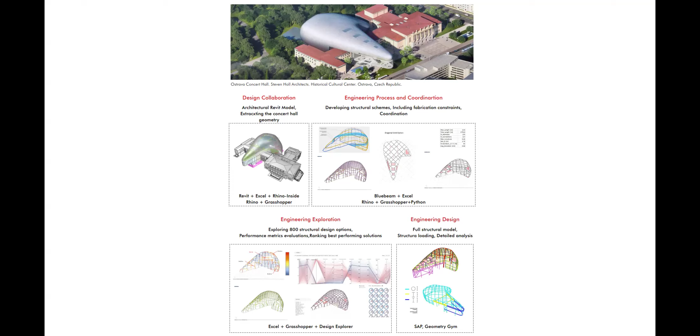This is an example of dome structure. This is a renovation project and studying the performance of dome. This is a Park Synagogue in Cleveland, Ohio. This is challenges regarding application of wind loads on dome structures and finding retrofitting measures.

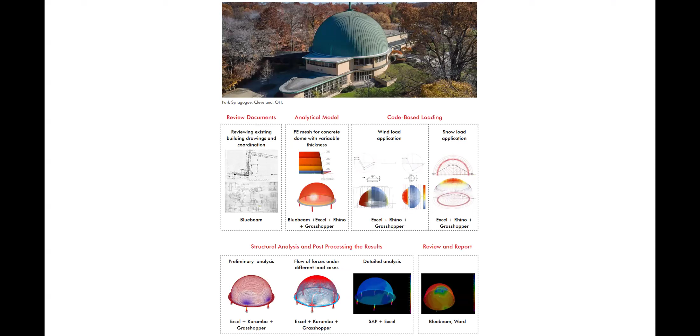This is a good example of how we use different materials for basically retrofitting existing buildings. This is buildings by NYCHA for affordable housing. The issue was the roof of these buildings is very old and it's leaking. So there's a lot of expensive measures that need to happen for the roof structure. And instead, this was a proposal to use mass timber to build a rooftop, basically a community garden as well.

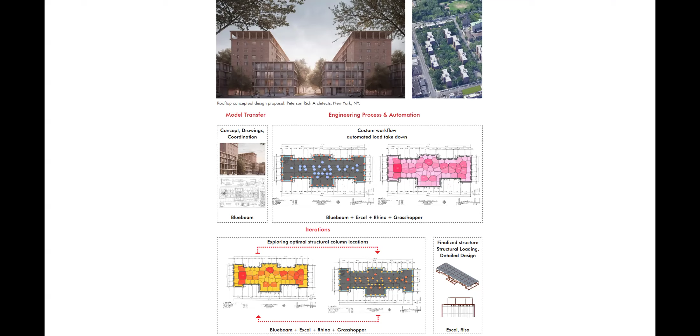And the idea was how to use lightweight materials in a way that the location of columns is optimized so we don't need any retrofitting for the foundations. That was why we went to mass timber.

Also, some of the design build projects and research work that I do, this is what I designed for the entrance of botanical gardens. Do people know Matthaei Botanical Gardens? It's a cool place for hikes and has a good conservatory. This was done as part of my research in my PhD, and we got a grant to design and build this piece. It was sitting there for 2 years.

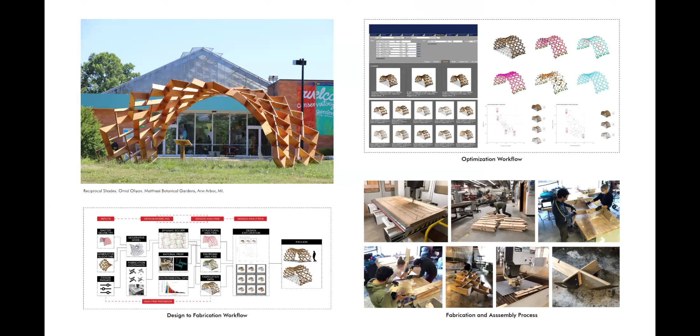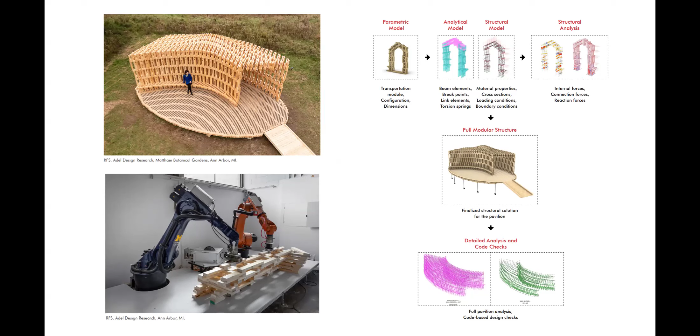This was a more recent consulting work that I was doing. Again, this was built at Matthaei Botanical Gardens. This is robotic fabrication of lightweight timber structures. This relates to the ideas that we're going to use in this term. It's interesting to think about reusing materials. This is small pieces of wood coming together so they can be recycled wood, reclaimed wood, and using robotic fabrication to take care of the complexity of assembly process.

This was another research design build project that was done at the University of Michigan. And the idea was to replace the connections in heavy timber joinery. Instead, we used tree forks. And this was the idea of going to these timber yards, finding these scrap material, bringing them, scanning them, figuring out a workflow that we can design them as connection pieces.

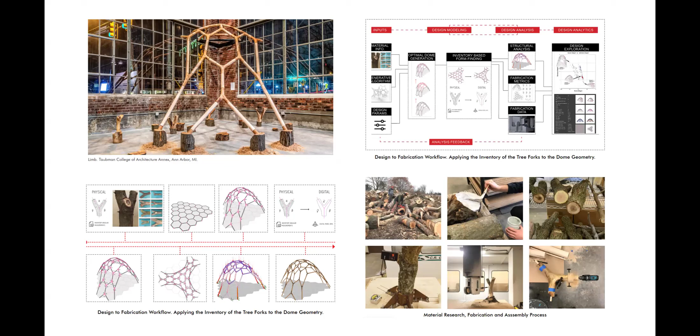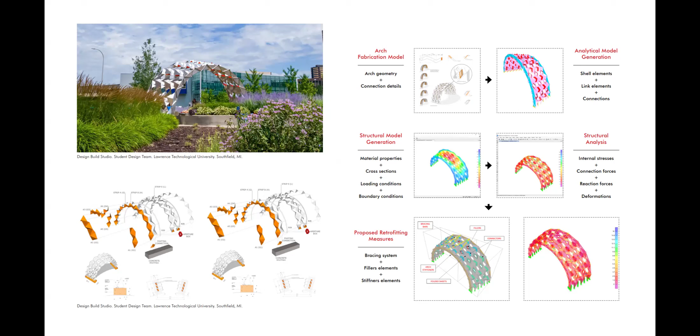I also did some projects at LTU and engaged in design build courses here. This was retrofitting measures for this arch. I don't know, have people seen this arch? It was sitting on your campus, yeah. So the idea was to analyze it to figure out if we can put some retrofitting measures in case we want to use it long term. This was how analysis informed figuring out those measures in terms of bracing, infills, and things like that.

Hopefully you get a chance to do these. There are a lot of interesting things where your fabrication, design, structural analysis, structural aspects all come together and you figure them out firsthand. So these are quite interesting projects.

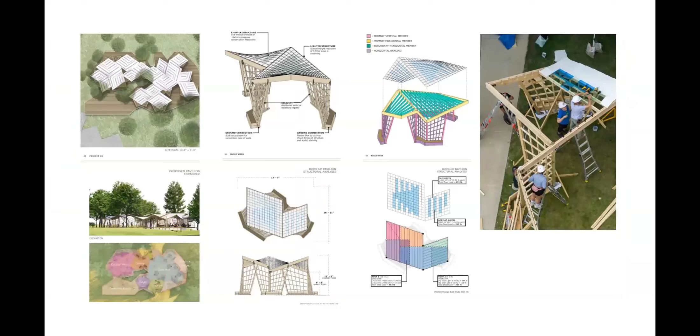This is another one which is at the entrance. This is interesting in terms of the lightweight wood framing, and then how they figured out the complex geometry using just linear elements. Okay. Hopefully we get a chance to talk about this type of projects as we work through the coursework.

But in terms of the syllabus, first of all, does everybody have access to Canvas? Is there anybody who doesn't have access? Yes, you're not in there, but you will be added to the course and you should be fine. But let me know. We're going to be in contact for the next 2 days.

So you should have access to the syllabus and you should already have gone through this. I'd like to review this together to make sure that we cover all the materials. Also, during this class, at any point you have questions, just ask questions right away. You don't have to wait. I don't mind interruption regarding the coursework or any other relatable question. Okay.

Let's see if we can share this. Right, it's good. I'm going to talk about Canvas files. We have some folders in Canvas where we share the information about the course and materials. Course description, please read through these and let me know if you have any questions.

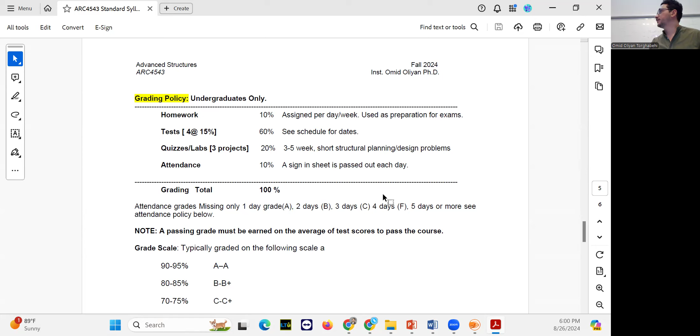Grading policy. Okay, so here is your breakdown of your grade. Homeworks. So we have homework submissions every week, and that's 10%. But I highly recommend you keep the due dates, review the homeworks, submit them on time. That's how you will be prepared for the test. I will share the homework answers later, past the due date. So you should really keep up with the due dates, but the homework answers will help you to understand that. But if you have any questions, talk to your TA or bring your questions here.

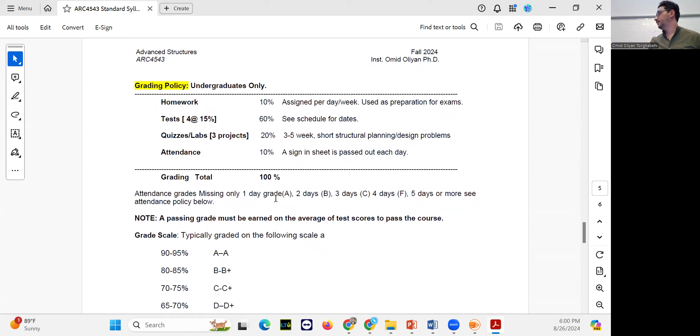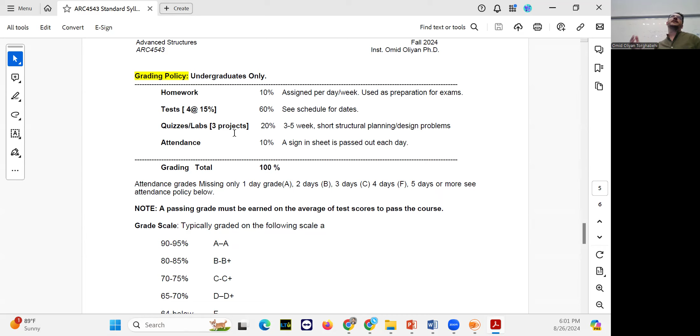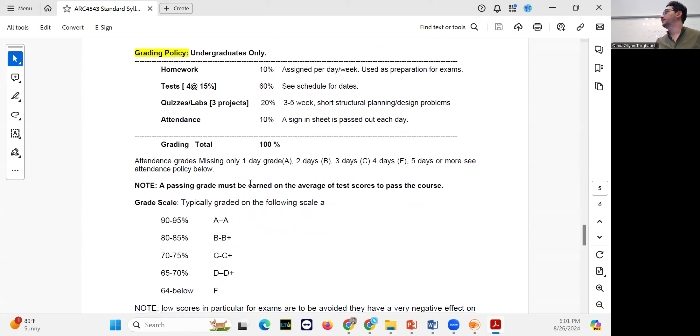The tests: you have 3 tests and then a final exam. You see, 60%. You have to really do a good job on that to get a passing grade. You have quizzes. There are 3 projects, team of 2, and that's 20%. And each of them has different phases. So weekly, maybe 1/3 of the class will be just going through your submissions every week or on the due dates. Also, attendance is mandatory. Do not miss a class. This is 10%. And also, you have to be present to ask your questions and understand the lecture content. So that's part of the grade too. And we'll take attendance at the end of the class.

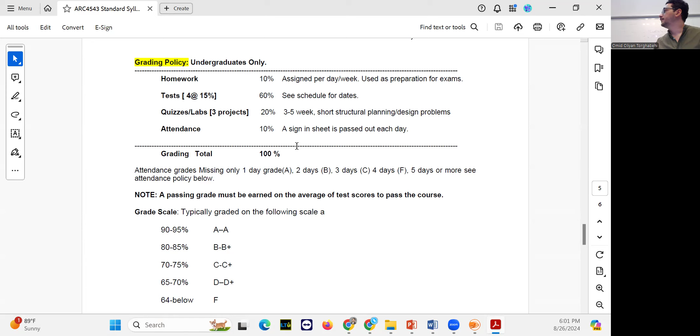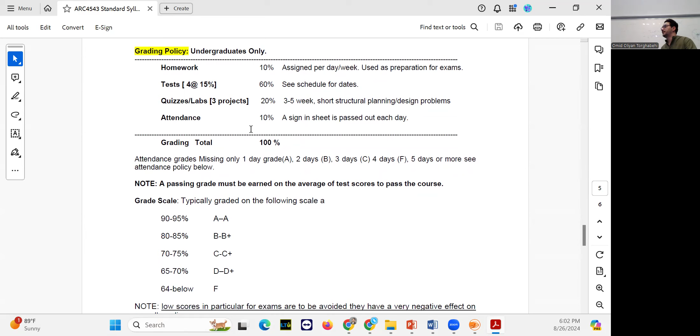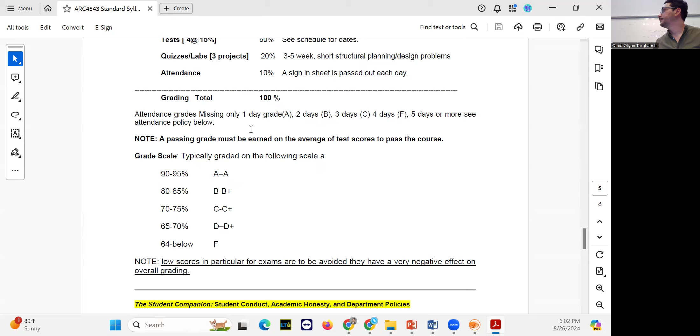Any questions about the grading? Once we talk about the projects, you'll know the nature of those projects, but everything will be shared the week before. Yeah. What's that? No, it's not going to be a cumulative of all the tests. Yes, and each test is just that chunk that you pass. For example, the first 4 lectures is test 1. Any other question?

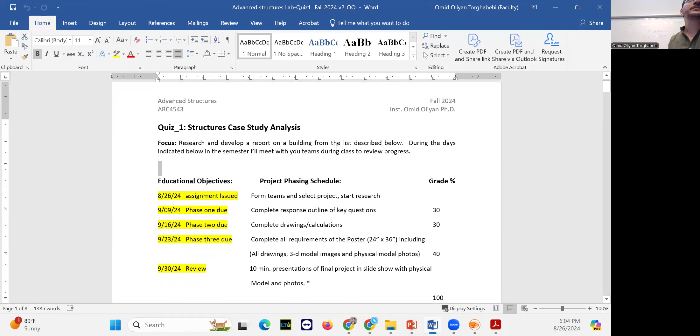Are there any questions about the schedule? Okay, take a look at it. Let me know if you have any questions. Everything should be self-explanatory, but let me know. And lab quiz 1. Okay, so this is lab quiz 1, for example. This is shared. You should have access to this. Please check first thing that you have access to this. The first assignment is to build your team. This is a team of 2. And you should choose your project from the list of projects, which is given at the end of this project description.

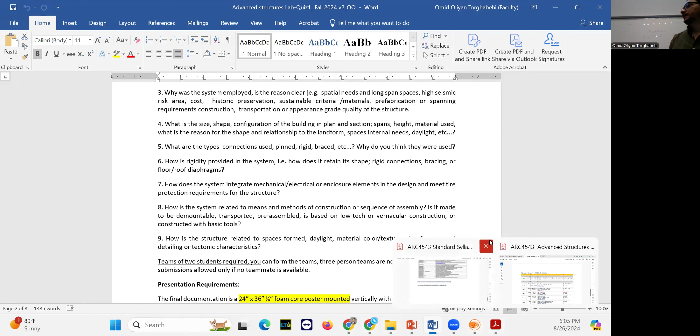This is a series of projects; this is a case study project, basically. You go through the project, you understand the project, you explain. You first do good research, find as much material as you need in terms of the structure, integration, architectural aspects, to answer a series of questions here. So this is phase 1, which is due on September 9th. So you go through all of these questions. First of all, you should choose your project. And because you have 18 students, so 9 teams, this is first come, first serve, no duplicate projects.

And for that, in the announcements, I guess I sent you, there's a Google Sheet that you, okay. Let me share this. So here is the announcement. Since it's first come, first serve, the first thing after class, go through those projects. And there's a Google Sheet here. You need to find your teammate, put the name. Oh, you're already done. Look at this. Pretty good. See, that's getting filled up pretty fast. So find your teammate, find a cool team name.

So you should find a teammate. Forgot your name. What was your name, all the way back? What is your name? Oh, you're already a team. All right. Just wanted to make sure you have a teammate. Okay, good. So fill this in. I guess everybody already has, or you're close. Perfect.

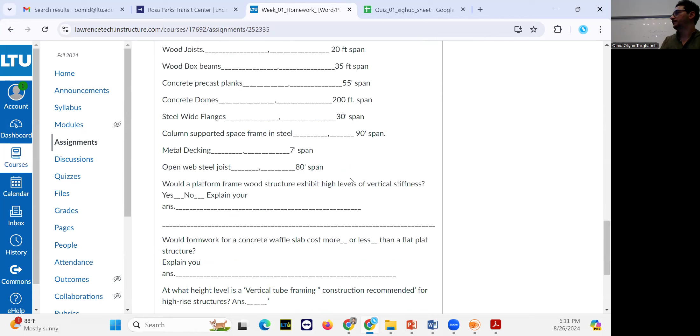The rest of your homeworks are online through your gradebook. You just enter calculation numbers. But this one is 2 readings. There are links, but there are also the PDFs if you don't have access to them for any reason. You read the readings, answer questions, and there are some simple span calculations. Write these in PDF or Word and upload them. Your TA will go over them, grade them, and will answer any questions.

Any questions about the homeworks? Does everybody know? No, just this one is. The rest of them are online. You just enter numbers. Yeah. There should be one. There's one that's due the 16th of December, and there's one that doesn't have a due date. Let's see. Canvas is weird.

Okay. I'm talking about this one. So Word or PDF upload. Is that clear? Awesome. Okay. But if you have any issues with the homework, let me know early on. These are due every week, basically.

Okay, now that we are here, I can show you the files. Everybody should have access to these folders. Do people have access to these folders? Good, good. Is there anybody except you who doesn't have access? All right. So here are the folders. Digital lectures. This is where every week I upload your lectures, so you read them before coming to class.

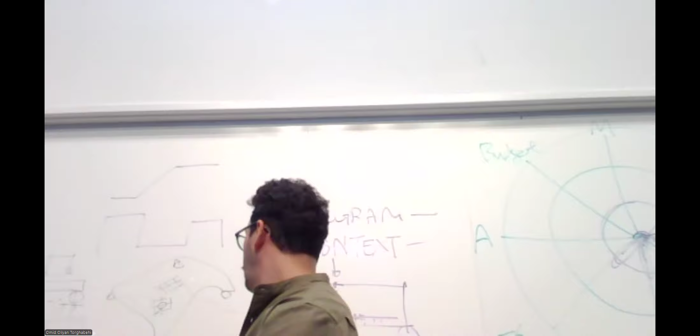This is the compression capacity of concrete, and it depends on how much cement it has, what kind of aggregate it has, but mostly what type of cement it has. And as time goes by, this goes up to F prime C. That's like 7 days, 14 days, 28 days. It kind of reaches its capacity. This means you have to plan that poured concrete waits that much. You pour your floors, you wait until you have that capacity to take out the scaffolding, before it gets loaded or construction work goes up. So it needs to be at least 75% or full 28 days.

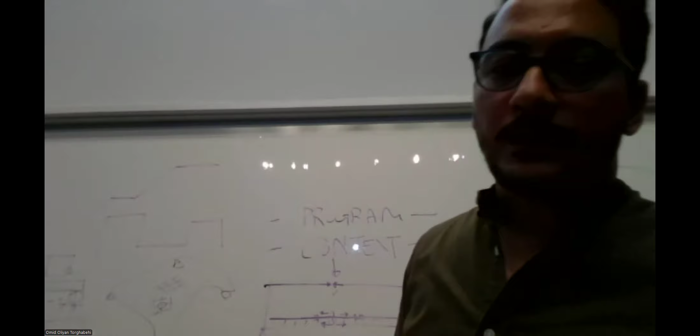There are fast curing concretes for different projects and also different capacities of concrete, which is gained by admixtures, the chemicals you add, that can extremely increase that. But for normal concretes, you have formulas for admixtures and the duration for curing, and that's what's applied.

The elastic modulus. What is elastic modulus? This is the first thing you should know in structures. What is it? Okay, there are three. Okay, that's good because it has relation to that, but that's not what it is. Yeah, it has relation with ductility. But what we know it as is: if you get a cylinder of concrete, take it to the lab, put it in a hydraulic jack and measure the deformations at the force it applies. If this is force, this is deformation, it has something like that for concrete, for example.

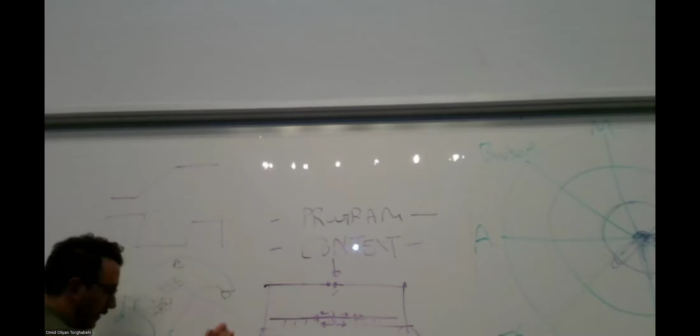And it has some elastic phase, and the slope of this line is E, which means how much force we put, how much deformation we get. So it is a measure of stiffness of that material. For steel, the diagram if you draw it is like this. When you said ductility, you're right for steel because it's a ductile material. This part is linear, this is E, but it takes energy until it suddenly fails, right?

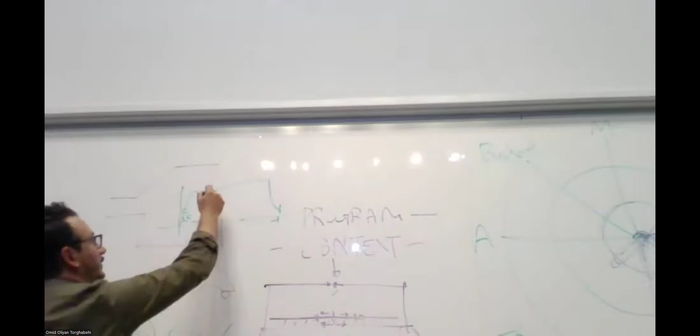Ductility is the area under this diagram, how much energy it absorbs before it fails. But when we talk about elastic modulus, it's the slope of the elastic phase, which means if I stop loading here and take the load out, this jumps back to its location. And for steel, they have these straps that we pull.

For concrete, we compress it. For steel, we use a tensile test. If I release it, it goes back. But if I pass this phase, if I release it, it doesn't go all the way back. It has plastic deformations. So the elastic phase is where we design it, which means it goes back when I release the force. If I take the load off, it goes back. Or for concrete, it goes back. For concrete, it's very small.

But the slope of this is the elastic modulus. So elastic modulus is a measure of how stiff a material is. And this in concrete relates to its F prime C, its capacity. In steel, it's not like this, but in concrete, there's a good measure of that. And E comes from a formula that I don't remember. There's something like, let's say, 5,000 times the square root of F prime C. You see?

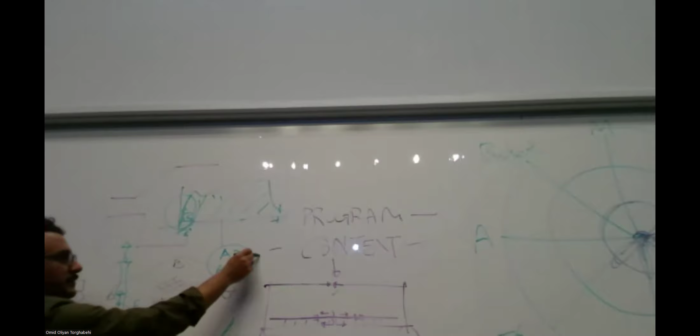So each type of concrete has a different elastic modulus. But if you have a certain type of steel, you have A36 or A50, which depends on the carbon in the steel, and it has a certain E. The type of material has the same E, but they have different capacity. For steel, it's Fy. But in concrete, its stiffness has a relation to its capacity. Okay.

Reinforcing types, we talked about this. Slabs, so we talked about this in the slabs. We have welded wire mesh, instead of in beams where it's rebar, and in slabs it's that, just a 2D version of that. Okay, this is what we talked about. We put the reinforcement where it's needed. Concrete is not combustible, so it's fire resistant, of course. So we can use it in higher fire hazards. It's insulative too.

And the way we work with concrete is there's a form where it can be poured, cast in place, or they're prefabricated in a production company. They cast them in specific modules, and then they're transferred to the site and assembled on site. So whether cast in place or prefabricated, based on the complexity that we create for the formwork, we can create different geometries, so different systems.

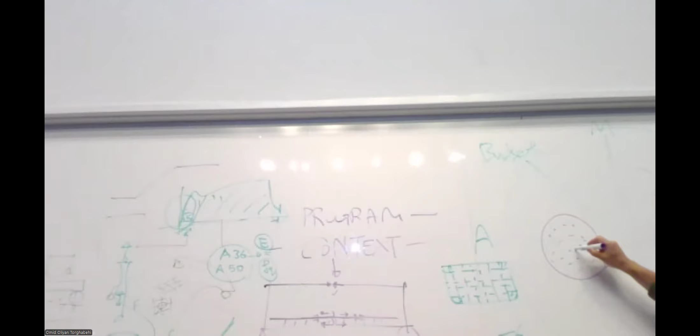Our main three construction materials: concrete, steel, and wood. Tell me, which one is a homogeneous material? Huh? Steel. What does homogeneous mean? It's all the same at any point in the material, right? But in more technical terms, homogeneous means at any point in the material, properties like E and Fy are the same. And that's because of the nature of that material, the crystalline nature of the steel, right?

Is concrete homogeneous? Why not? Yeah, it is basically a composite. So you have aggregate, you have a matrix of cementitious material, and then you have your reinforcements. It's composite action between multiple types of materials, with E1, E2, E3; at any point we have different materials. So how do we design it? We have E for concrete, we have E for steel, we design based on that, right? So we share the action. Concrete takes the compression, the steel takes the tension, and we design based on the appropriate elastic modulus.

What about wood? Is wood homogeneous? Why not? Fibers. What's that? I feel like there's different ways that the grain goes that causes it to have issues at certain points. Exactly. So this is a dimension lumber, and you see there are grains. Basically this is a mineral material. This is a composite material. This is a biomaterial, a living material, right? So you have grains, you have cells that are connected together with natural glue, which is lignin. Here we have minerals like aggregates glued together with cement, and here we have a homogeneous material.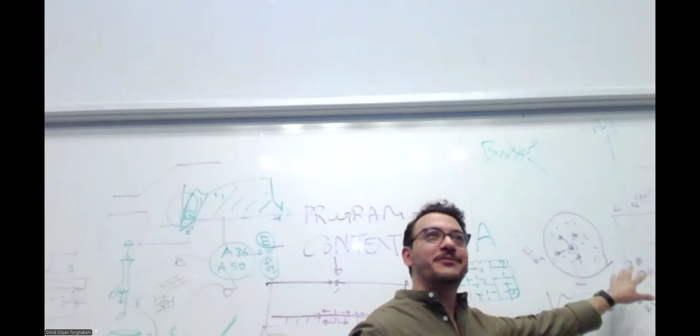All right. So we have different materials. The behavior is different. Their reaction towards different loading is different. So the design process for each material is different. Although when we have a structure, we put the environmental loads on it and calculate internal forces, when we compare those forces to the capacity of material, it differs between materials. In steel, different response. In concrete, compression is taken by concrete, tension by steel. In wood, it depends on what direction.

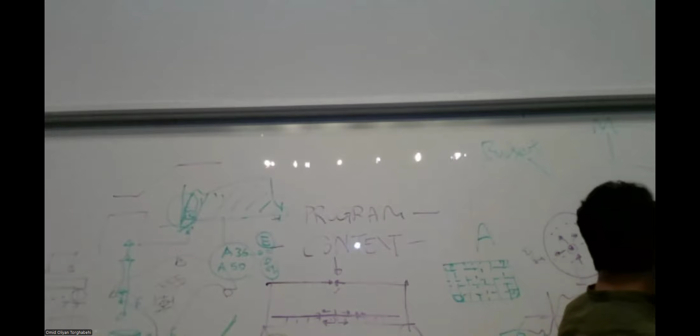If you have compressive force in a column, we compare it to its compressive capacity. Shear depends if it's perpendicular to grain or parallel to the grain, different capacity. So the idea is that we analyze them as a certain type of material with their properties, and when we design them, we take account of what type of material they are, very different. Mineral, man-made composite, biomaterial. Any questions? Good.

Precast panelized, the same idea. Instead of beams and columns, we have modular systems. We can have panels that are like a kit of parts that come together. Okay, some cool questions at the end of this. All right, let's go. What conditions affect construction type? Building height, building area, fire rating, occupancy.

Wait. Oh, yes. You have a question? What was the answer? Okay. All of the above, because as we talked about based on IBC, all of these depend on what type of structure you want to design. You can't design it from any material. It depends on how high it goes. It depends on what occupancy it has, right? So they're all factors.

What structural material has the highest fire rating? Concrete. Concrete is sometimes used as insulation too. It's not combustible. What happens to steel when fire happens? What happens? Say it. It melts. But the problem with steel is you have a certain time before it fails, and it doesn't fail only when it fully melts. So we talked about the stiffness and load deformation. This is the stiffness that we talked about.

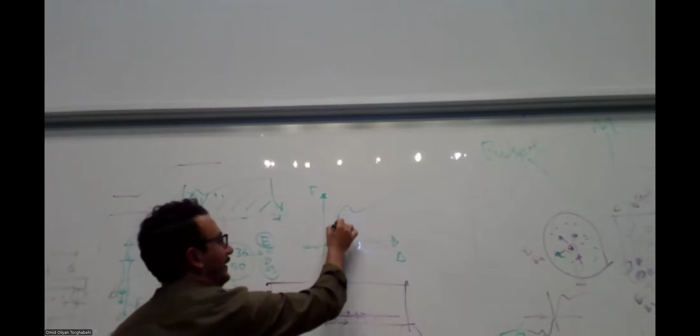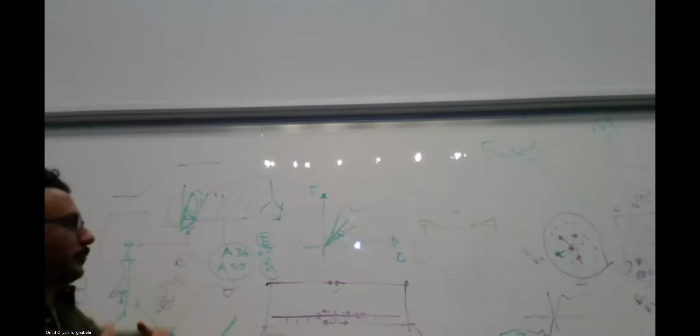When we heat up steel, the movement of the molecules or the steel grains increases, and this shifts. So it becomes less stiff. What does that mean? It means that as it heats up, the beams start sagging under the same load. So it fails because of significant deformations. The stiffness of the steel gets reduced as the temperature goes up. But concrete doesn't have this problem. That's why sometimes they create a concrete casing around metal columns.

What structural material is most easily adapted on site with hand or power tools?

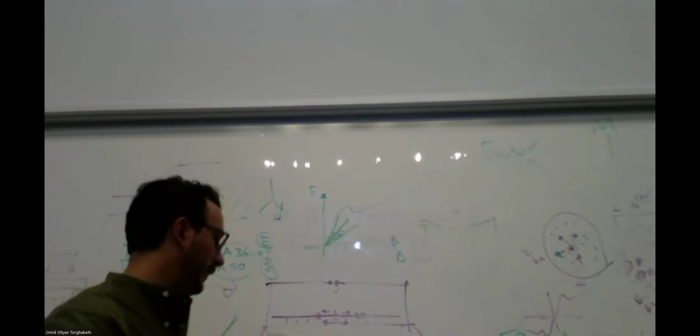They do these kinds of things, but they calculate, basically they think about this length as a cantilever at that point. If it still can cantilever, then that should be fine, which means that the top mesh of steel rebar should be enough to take it as a cantilever. Because when it's continuous, the lower part here is in tension, but when we create a cantilever, the upper part goes into tension. So it's a very difficult thing to do, but if it works, it should handle it.

The thickness of the slab is calculated as well beforehand, based on where the openings are. Does that mean the thickness of the slab is affected, or would it be just over-designed? If it's cantilever, it's fine, uh-huh, but what if the thickness of the slab is calculated properly? That's it. A lot of times that doesn't work.

You're right, because the thickness of the slab basically defines the arm between the tensile force from the reinforcement and the compressive force of the concrete. If it's designed for a continuous single span, it's way smaller. When you want to design it for cantilever, it requires more, and that's why most of the time you can't, and it's hard to reinforce this way. There are ways. Some use carbon fiber strips that they put on the tension side, but it's a really difficult technical thing. So you're right. We can't cut the staircase in the central slab.

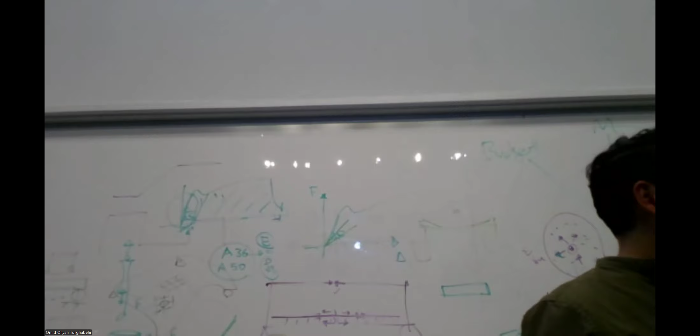Okay. First of all, don't worry. That's okay. You have a background in architecture? Yeah, so I did structural technology, and then I transferred to finish my master's here. So I didn't do structures 1 and 2, but they gave me a transfer, so this is the only structures class that I have. So you never took any structures classes? I did take structure classes, but I just don't know how the structure classes are here, so I don't know if it's the same thing.

Don't worry, it's the same thing, more or less. There are different systems based on how much they cover in each one. And there are non-technical, more design-oriented ones that are a little bit different, but the bases are all covered. So you're good in terms of structures. If you transferred, that has been acceptable. And for the type of projects we have, you should be good following the class and the homeworks. So you should be fine. Do not worry.

You have all the instructions. And if you do good on the homeworks, you will do good on the test. So just follow up with that, come to your TA and me for any questions. But there's nothing to worry about. The only reason I asked was that there's a prerequisite. If the students didn't take it, they should know that; it was more administrative problems, but you're good. Okay. Thank you so much, I appreciate it. Of course.

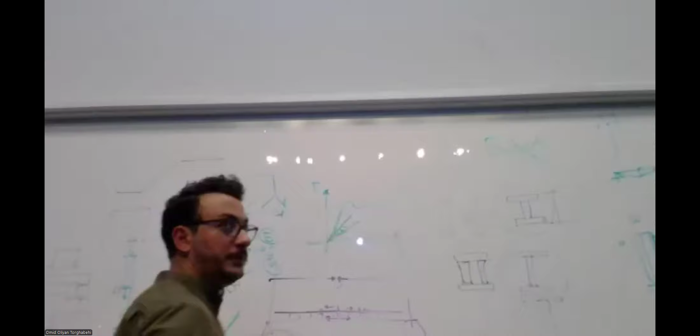W sections and composite steel concrete. This is a very common way of building, and it adds some optimality in design and use of the steel. You can have your steel beams and put your flat plate on top of it, or you can put studs, shear connectors. These shear connectors, the studs, are welded on top of your beams, along the beam, at the top of the uniform elevation, here, right?

And pour concrete. When concrete cures, this part of the concrete works as a composite with your steel I section. Which means that, in the same way, concrete takes the compression and the steel takes the tension. They work together instead of each working separately. So this increases the load bearing capacity of the beam, so you can actually use a smaller beam compared to non-composite action. That's when you have shear studs on top of the beams and pour concrete onto corrugated steel.

We have steel truss joists and plate girders. So trusses, open web joists. Where have you seen open web joists?

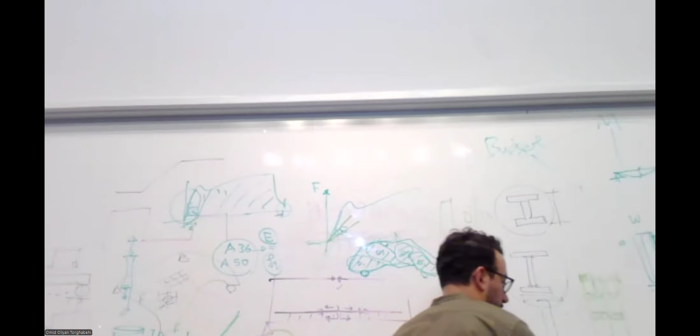Funicular cable. What is funicular? What is a funicular shape? You know this. Funicular shapes are the geometries for cables, meaning the shape of a catenary curve. If I have a cable supported at two points, it takes a shape because of its weight. A cable can't take any compression or bending, right? So all of the pieces are in tension. So that geometry under its own self-weight causes only tension in the material.

If I freeze this and rotate it, under its own self-weight, I have a dome which is only in compression. There is no bending in this. This geometry means it's an optimal design, because, let's say, masonry or concrete is weak in tension. If I design it this way, an inverted cable, under its own self-weight it only carries forces in compression, which is the best way the material can work.

So optimal geometry is this. This is called funicular shapes. So the catenary curve of a cable, when I invert it, becomes the optimal compression-only funicular arch or dome. This is basically what it is. So this is kind of a structural optimization technique.

If you've seen the works of Gaudi, he was using what is called the hanging chain method to design these cathedrals. Basically you have a network of wires and hang sandbags from it; inverted, that informs the funicular shape in three dimensions. There were no computers, of course, so this was a physical way. When you invert it and build it that way, it's all in compression. A good way of doing masonry structures and optimal compression-only domes and geometries. So funicular forms, again, form active funicular arches.